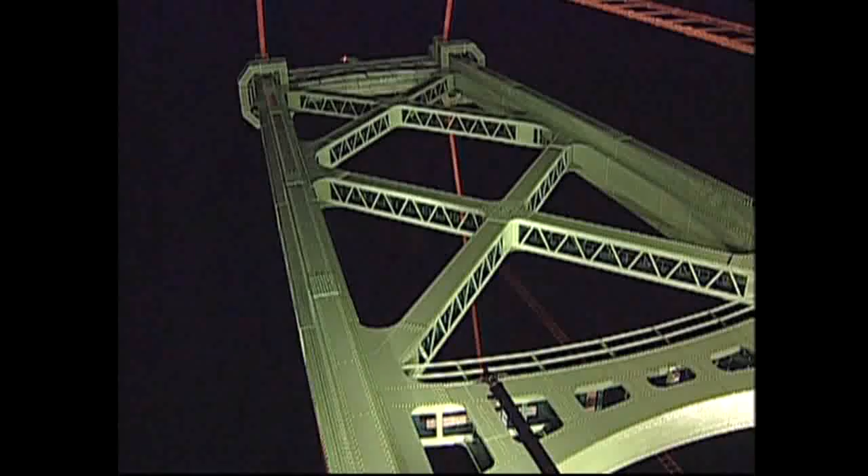The Angus L Macdonald Bridge was not the first bridge across Halifax Harbour. Canadian National Railway built a bridge in 1884. It was a steel swinging drawbridge that was 40 feet wide and a quarter of a mile long. On September 7, 1891, a severe storm blew it down.

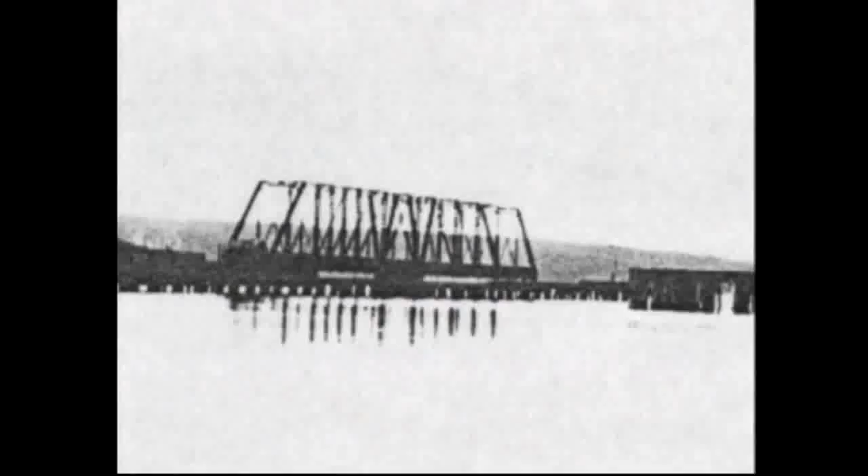The second bridge was built in 1892. It lasted hardly a year. There was no storm this time, no roaring wind. The bridge simply collapsed on a calm July night. The builders had tried to drive bridge pilings into solid bedrock.

It was not until after World War II that plans were laid for building a third harbour bridge. Angus L Macdonald was the man who recognized the need for it. Post-war Halifax was growing, and harbour ferries could not handle the increase in traffic.

Returning veterans from the war wanted the good life that they had dreamed about when they were slogging through mud in Europe or sailing the raging North Atlantic in supply convoys. They wanted a good job, a home of their own, and an automobile.

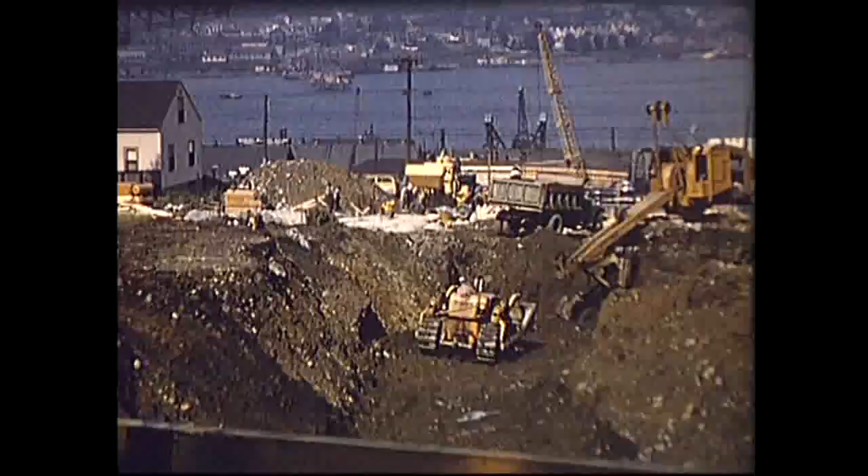For the generation still shaken by the Great Depression and the Second World War, the Angus L Macdonald Bridge was to become a symbol of hope, a sign in the sky that they could span the tragedy and destruction of the past 2 decades and build a secure and prosperous future. But building the bridge would not be easy. And before it was finished, the Angus L Macdonald Bridge would cost 6 men their lives.

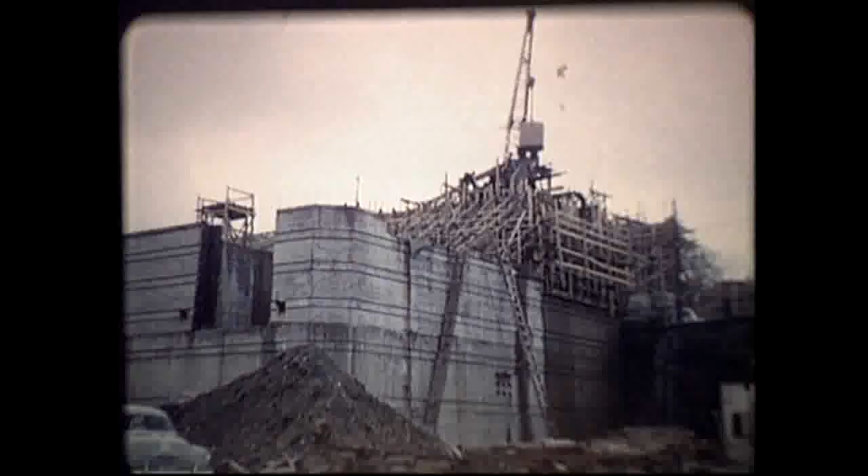The foundation was first. 2 massive concrete blocks, each weighing 20,000 tons, anchored the bridge on both sides. And in the case of a suspension bridge, the massive anchorages for the cables are sort of like icebergs. You don't see half of the mass of the anchorage when you look at them now, because half of it at least is underground. So they are very massive indeed to resist a very heavy pull.

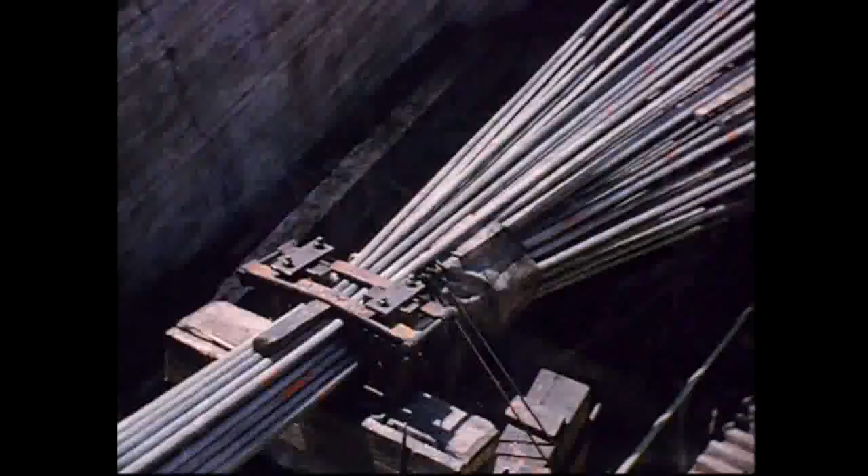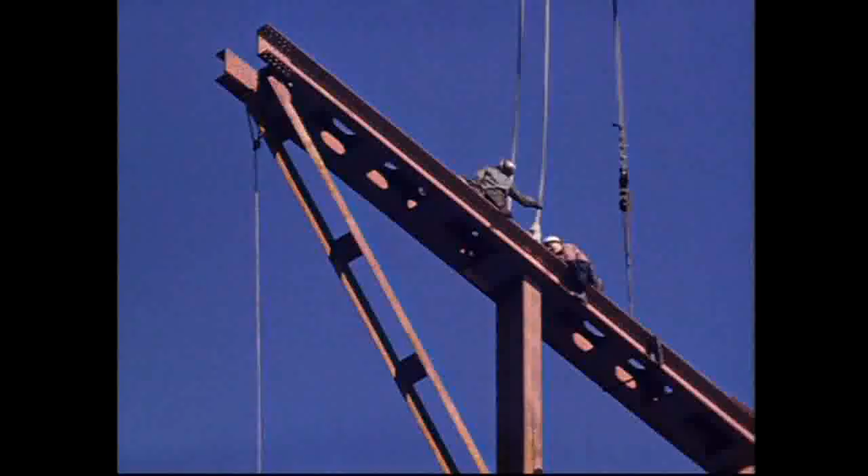People stood in awe to watch steel beams flung out over the water and then set in place and riveted. One span after the next extended from both sides at once. They were like arms reaching out for a handshake. So the bridge suddenly sprouted in 1954.

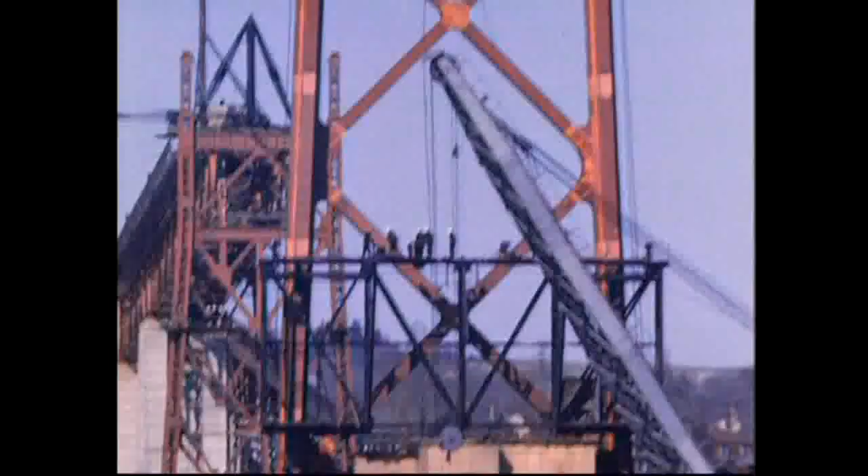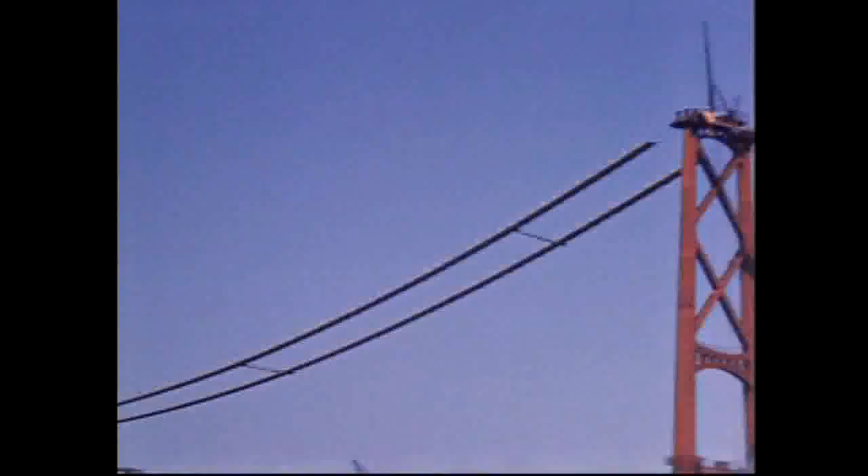By the late summer, we had the towers up and started putting the cables up. And that took about 3 weeks to put the cables in place. And then we started putting up the trusses, and the bridge took shape in about 6 weeks.

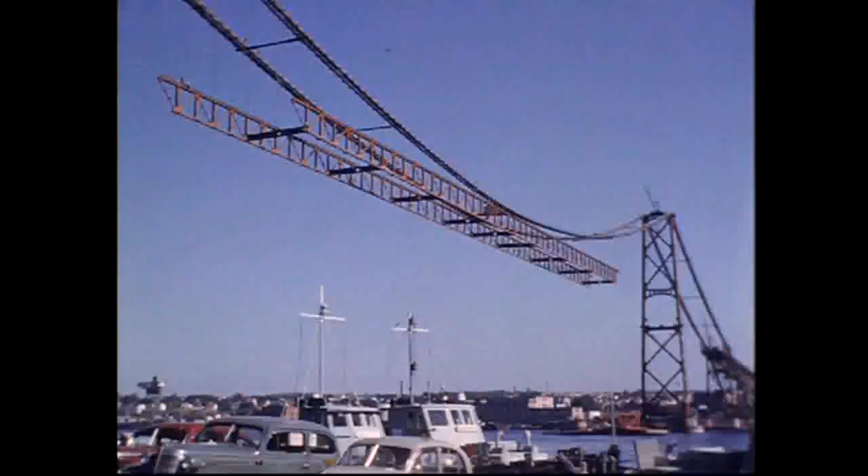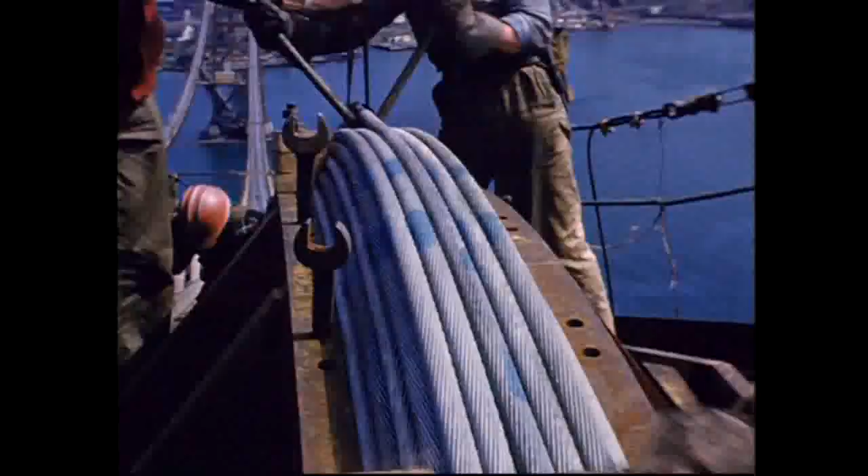Two main towers, each 300 feet tall, were strung with 72 miles of steel strands squeezed into these steel cables. Each cable contained 61 strands. The towers and piers carry the dead load of 75,000 tons of concrete and 8,200 tons of steel.

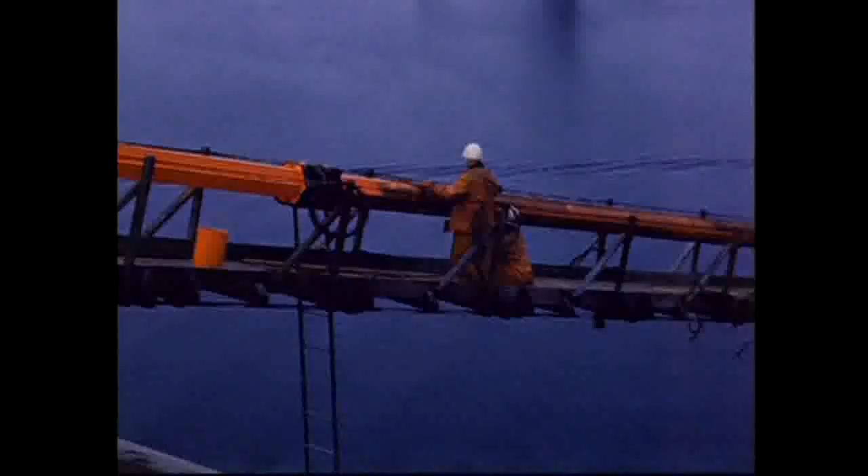Yet for all that weight, the Macdonald Bridge seems suspended in the wind as it stretches nearly a mile from shore to shore. Hugh Prattley was on site the whole time of its building. He was even up here with the ironworkers. For him, this was the top of the world.

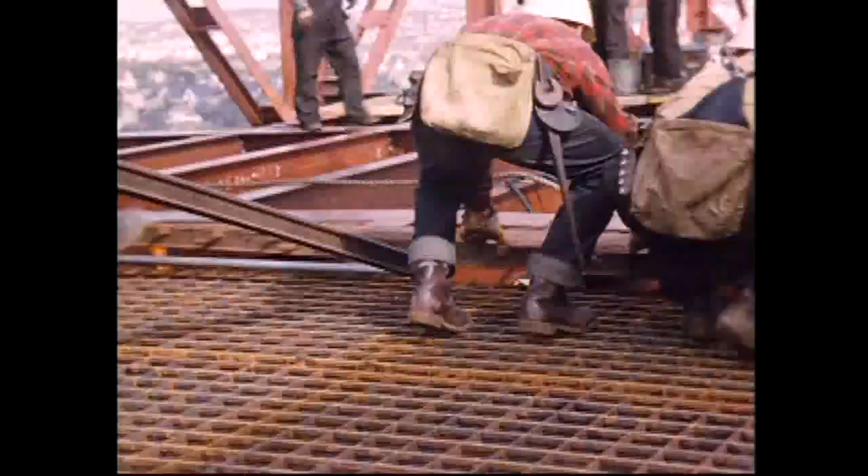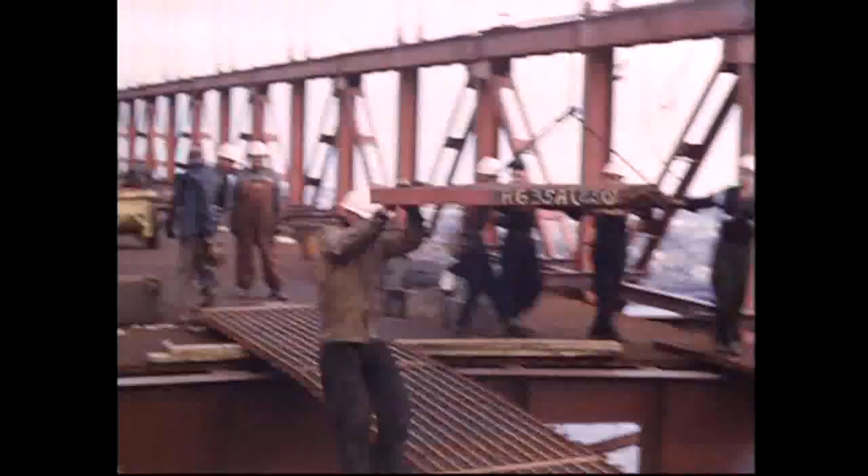From ground level, it looked as though these men were riding girders and trusses across the sky. They were iron men who pulled muscle from bone with the climbing and scaling to the tops of these towers. They were tough, and they were fearless. On July 3rd, 1954, a random wind caught one of them and threw him to his death 200 feet below. His name was Jean-Marie Boulanger.

But I actually witnessed one man hanging on for dear life because the catwalk was twisting badly, and eventually it threw him off. He couldn't hold on, and I saw him fall right into the harbor. It was a terrible experience for me to witness that. Of course, he was killed instantly, unfortunately, but it was best for him that it was instantaneous, I guess. By the time the steel grid deck was set in place, 5 more men would lose their lives in building this bridge.

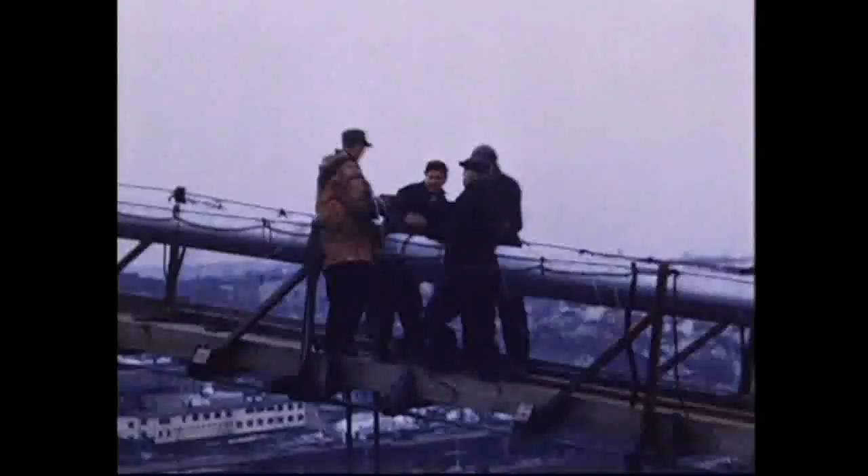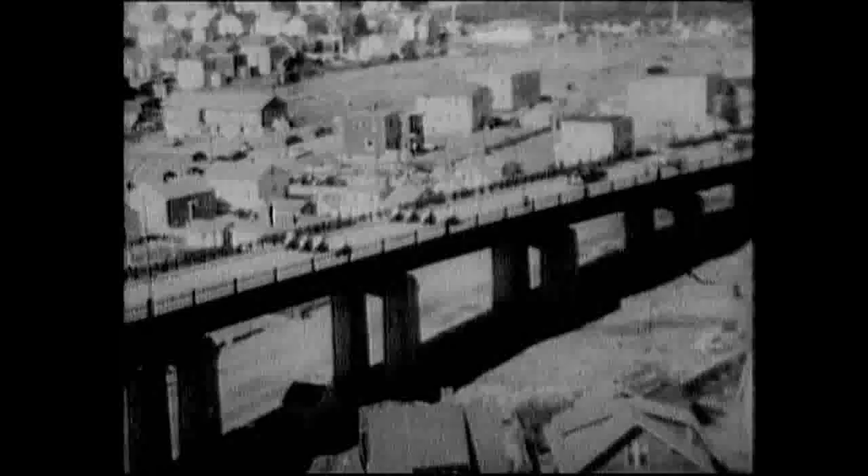On April 2nd, 1955, the Angus L Macdonald Bridge was officially opened. Almost at once, the Macdonald Bridge proved its financial worth. The estimate was we would get up to 1 million vehicles per annum by about the 3rd or 4th year. In fact, we had 2.5 million the first year. Over the next 40 years, the bridge became an old friend to both Halifax and Dartmouth. Often, it was the focal point for civic celebrations.

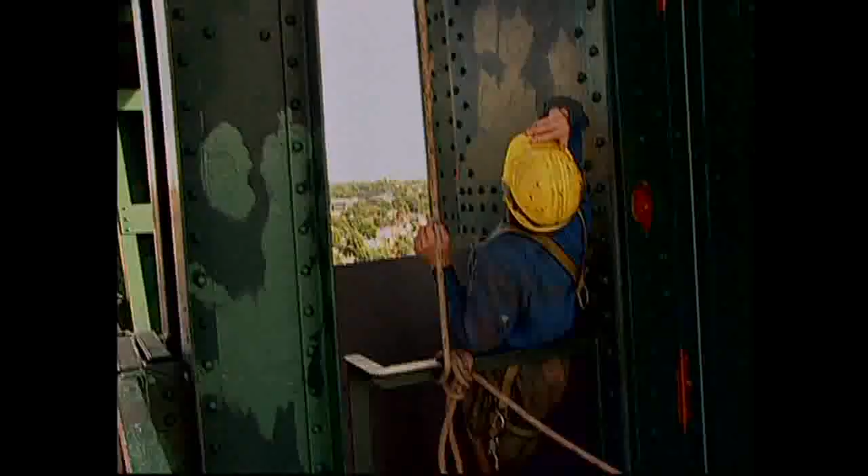Each day for 40 years, thousands and thousands of cars beat the pavement down to the steel decking. Time and the weather have worn the shine off the old bridge. During an annual inspection, the engineering firm O'Halloran Campbell determined that rust and corrosion have made the bridge a little frail and much in need of rejuvenation. The approach decks needed replacement.

So I began to think, well, if we're going to mess up the traffic, so to speak, by tearing up the approach decks and taking a year and a half or whatever length of time to complete the replacement of the approach decks, maybe we should do the 3rd lane because it had been talked about for years. The engineers determined there would be cost savings and time savings in expanding deck replacement into a 3rd lane project, which included the addition of a bikeway and a sidewalk. The engineering began in January 1996. And it'll actually be pre-surfaced.

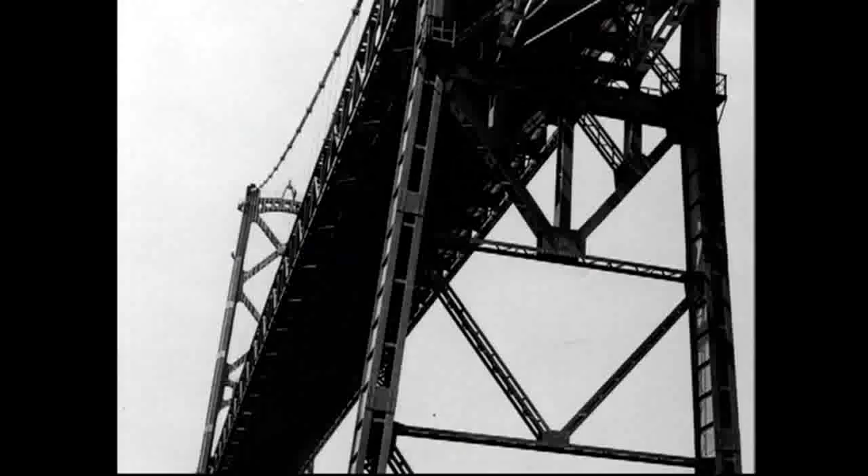There certainly were challenges on the 3rd lane project. One of the big challenges was how do we accommodate 3 lanes of traffic on the bridge from the old 2. That involves changes in loading. Load on a bridge is calculated as dead load and live load. Dead load is the load of the bridge itself, the concrete and steel. Live load is the traffic crossing the bridge. Together, they make up the total load the bridge was designed to carry.

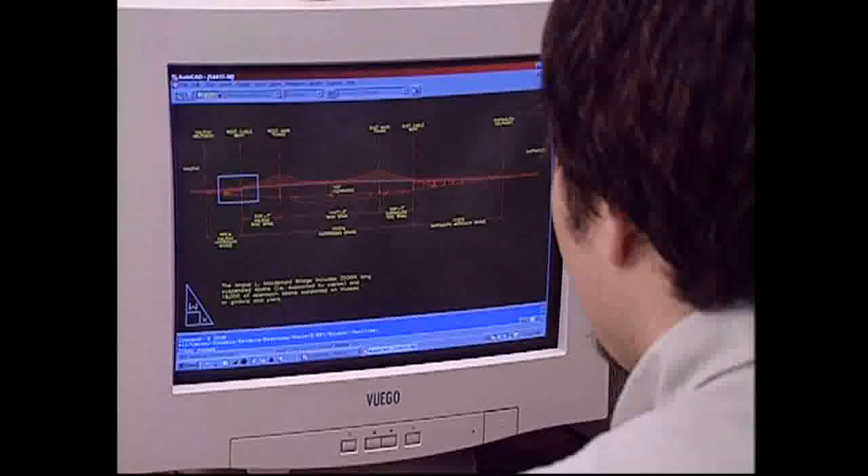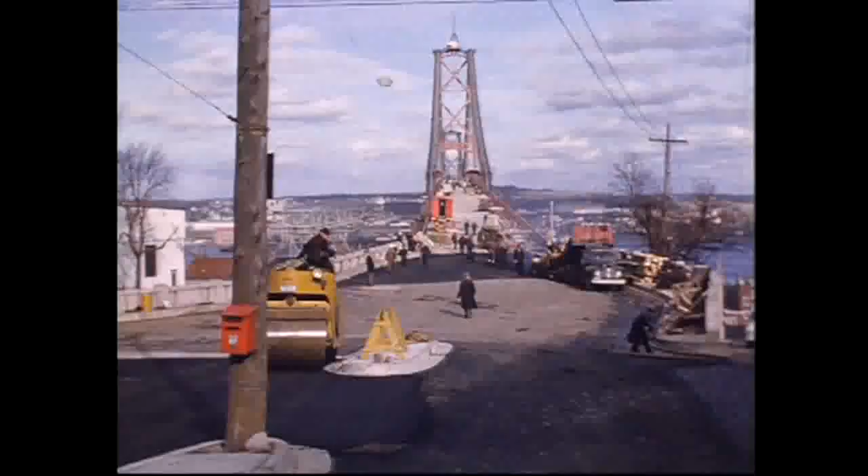O'Halloran Campbell had developed and engineered the method for adding an extra lane of traffic, as well as adding a bikeway and sidewalk without increasing the total load on the bridge. It sounds almost impossible. Now, in the case of this project, we had 3 advantages playing in our favor. The first was that when the bridge was designed in the early 1950s, it was designed for the normal mix of truck traffic. More recently, the approach roads, both on the Halifax side and the Dartmouth side to the Macdonald Bridge, were no longer designated truck routes, so the bridge was not used for normal large trucks. No trucks means that the bridge carries a lot less live load than it was designed to carry.

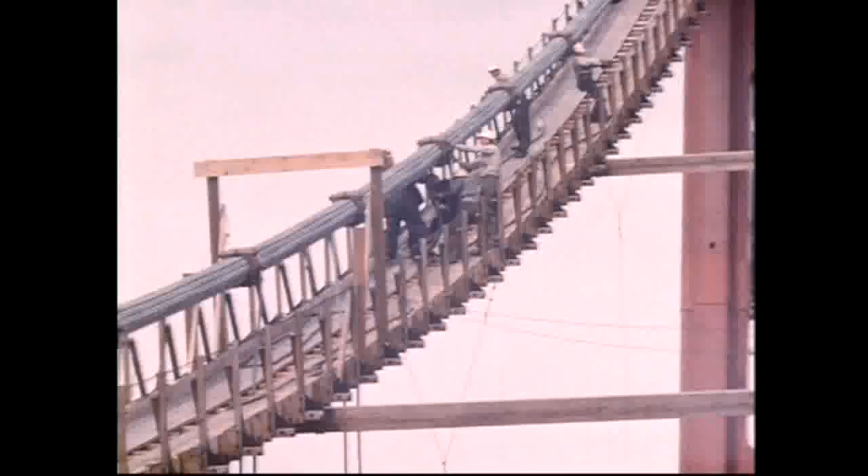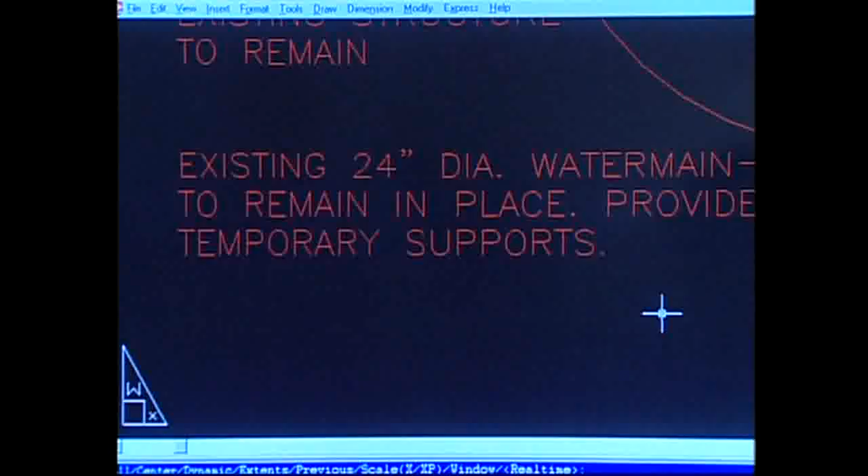The second item in our favor was that whereas the Macdonald Bridge was designed to take a 30-inch diameter water main, when the water main was installed, which was in 1971, it was installed as a 24-inch water main, so it meant that the load from the water main was less than it had been designed to be. In very simple terms, the engineers traded the calculated weight of truck traffic on the bridge and water through the water main for the extra weight of the third lane, as well as the bikeway and sidewalk.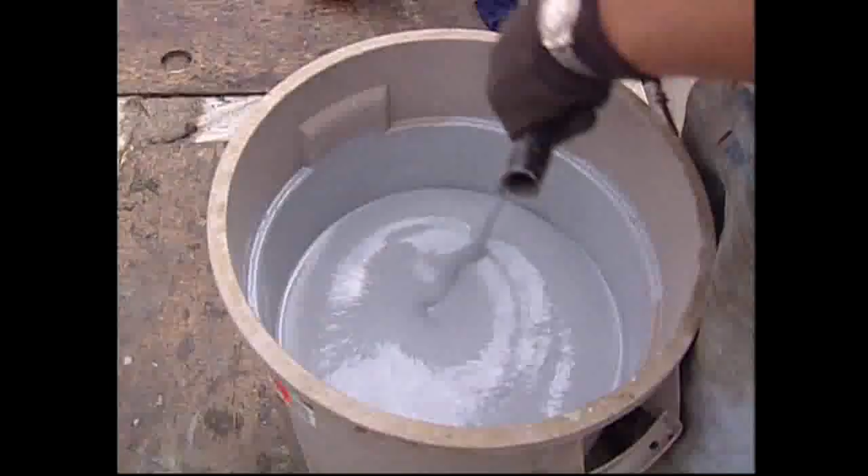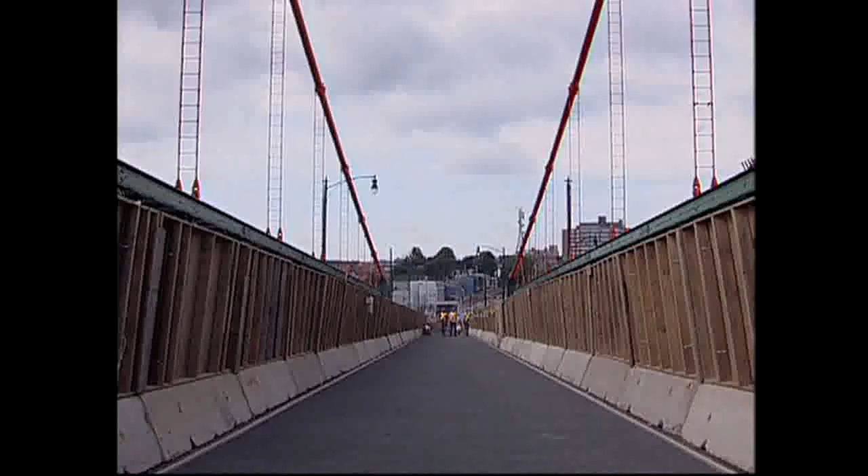A third advantage playing into the project's favor was the engineers' decision to use a lightweight epoxy wearing surface instead of the 1-inch heavier asphalt. Had we not been able to use those lightweight wearing surfaces, and for instance, had we had to accommodate truck traffic, then we would not have been able to move forward with the third lane project.

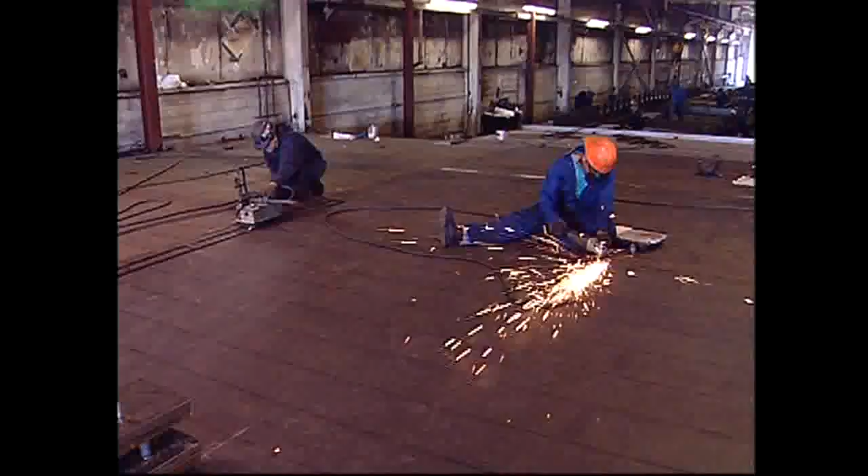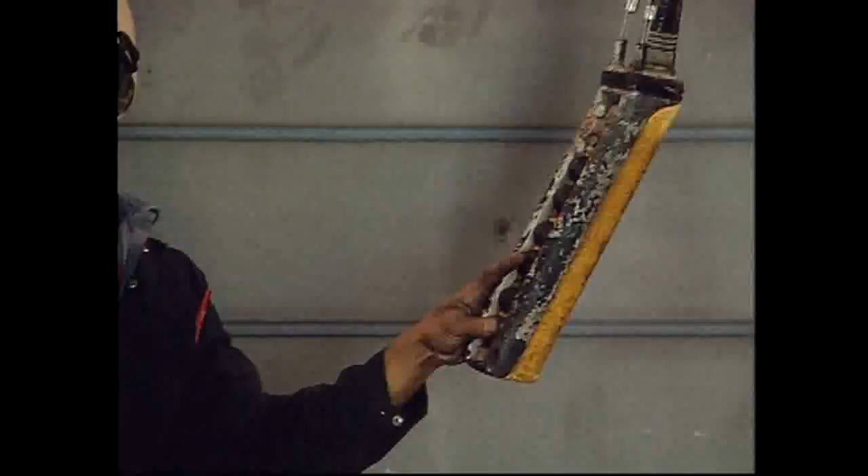Diaphragm plate here. Another factor was the use of a lightweight construction material called an orthotropic steel plate. Steel plate deck and the supporting structure. In simple terms, it's a near horizontal steel plate, which is about ½ an inch thick, and it has stiffening ribs running underneath it in the direction longitudinal to the bridge, that is, with the direction of traffic.

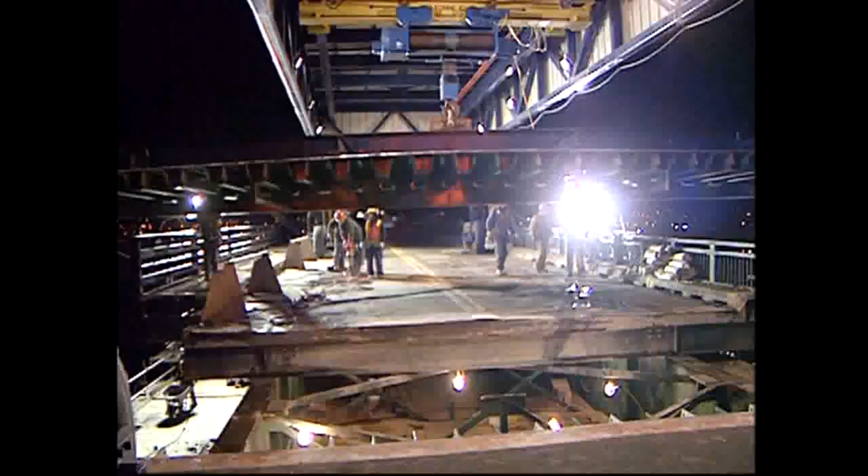The orthotropic steel plate allowed the engineers to design deck replacement one panel at a time. This new lightweight orthotropic steel plate would be used in the roadway area on the approach spans and on the sidewalk and bikeway. The next engineering challenge was this: where to put the third lane of traffic and where to put the bikeway and sidewalk.

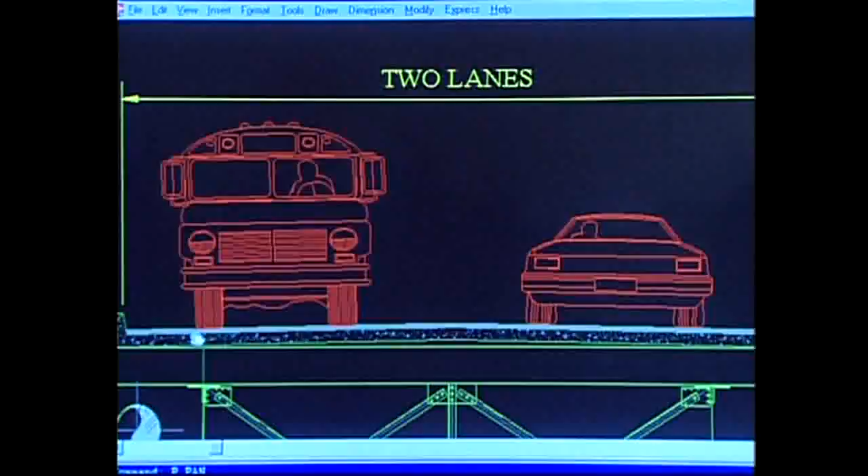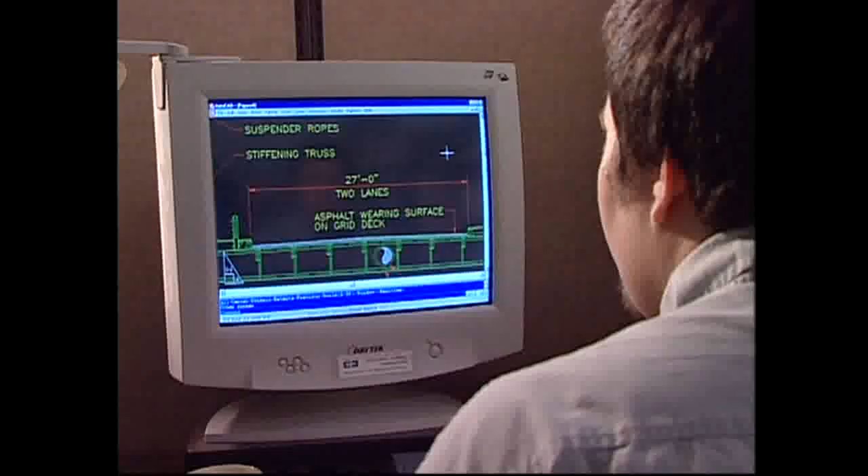On a suspension bridge, the width between the stiffening trusses is fixed. To the average eye, there just isn't enough room to accommodate a third lane. O'Halloran and Campbell, however, did not see it that way. What they saw was the width between the stiffening trusses accommodated 2 lanes of traffic, plus a sidewalk and ductway for utility cables. The sidewalk and ductway each measured about 1.5 meters wide.

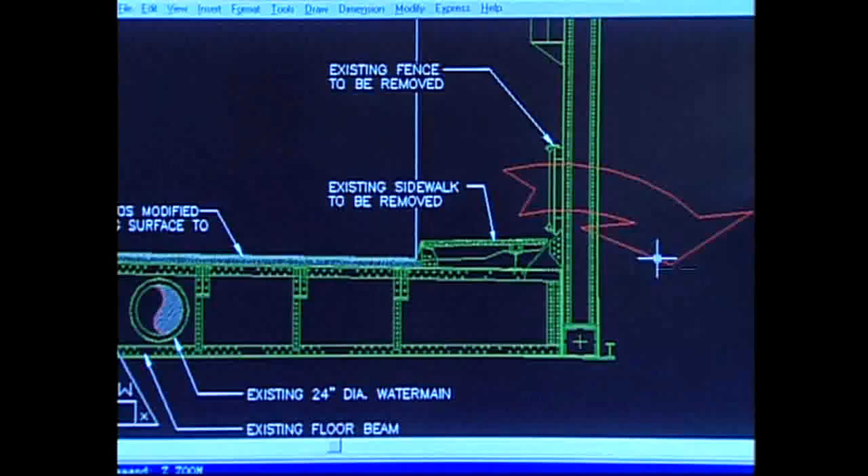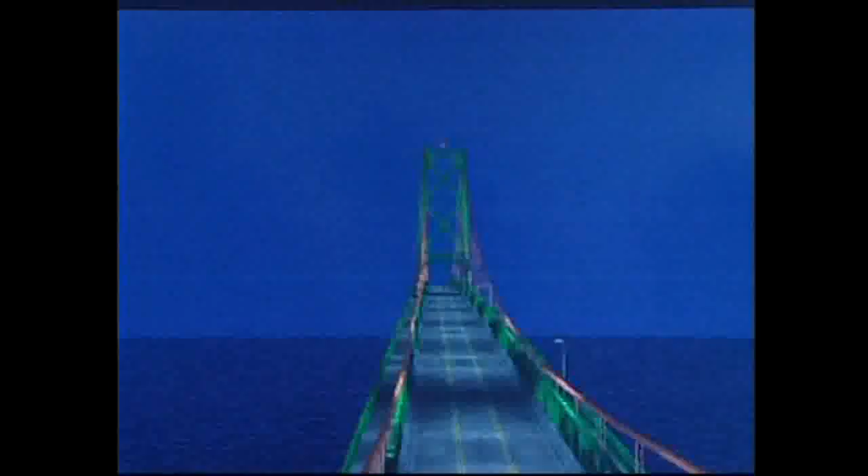We were able to take all of those cables and put them underneath the deck of the bridge in a specially made cableway. By taking the south sidewalk and converting it to a cantilevered structure outside the main truss, and doing an exactly similar thing on the north side with the bikeway, we were able to open up the available width inside the trusses. Cantilevering the bikeway and sidewalk from the bridge structure provided the next big challenge.

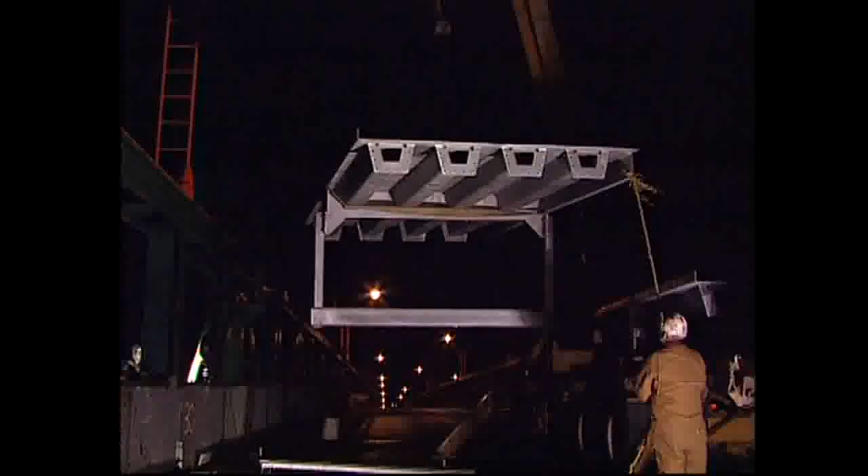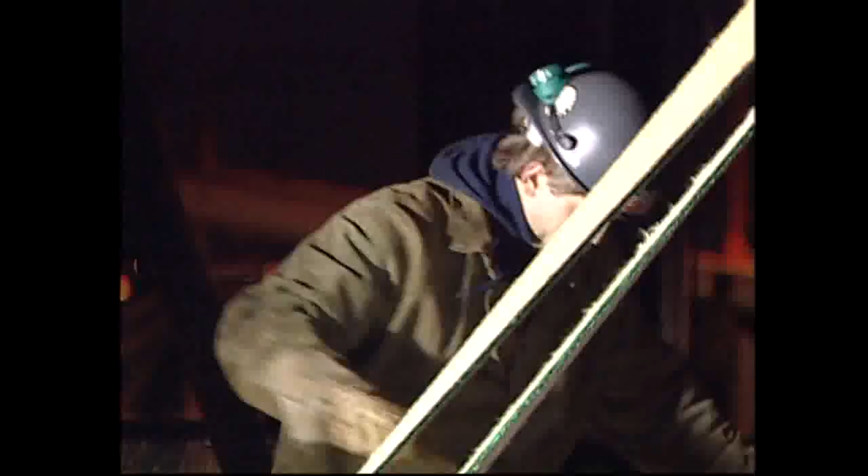It all may look good in a computer graphic, but how well will the bridge and these extensions endure the high winds that blow down Halifax Harbor? The bridge, of course, has been standing there at that time for 40 years and had survived a few hurricanes, and so we knew it was pretty solid, but we didn't know what the sidewalk and the bikeway would do to the wind resistance.

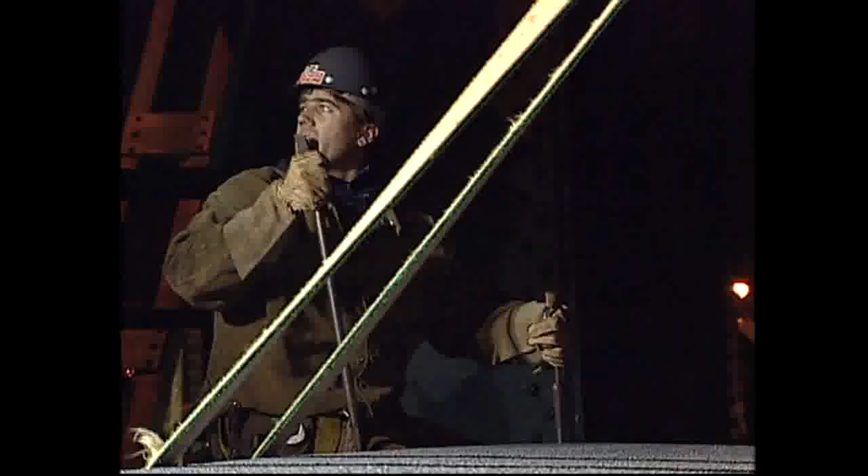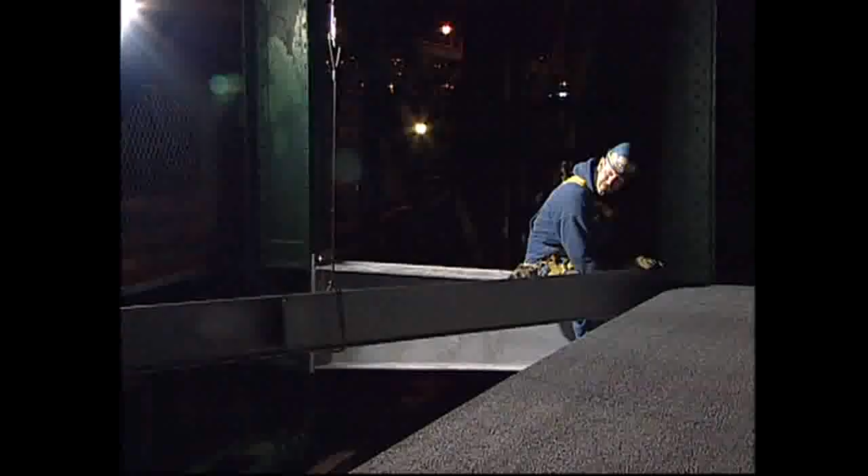Come on down. It was necessary to do aerodynamic modeling, and it was found, interestingly, that the performance of the bridge was better if we had symmetrical cantilevered structures. So that meant the sidewalk and the bikeway could both go ahead as proposed, and they would each balance the other and give better aerodynamics. Turned out to be a safety factor. We had actually improved the safety of the bridge.

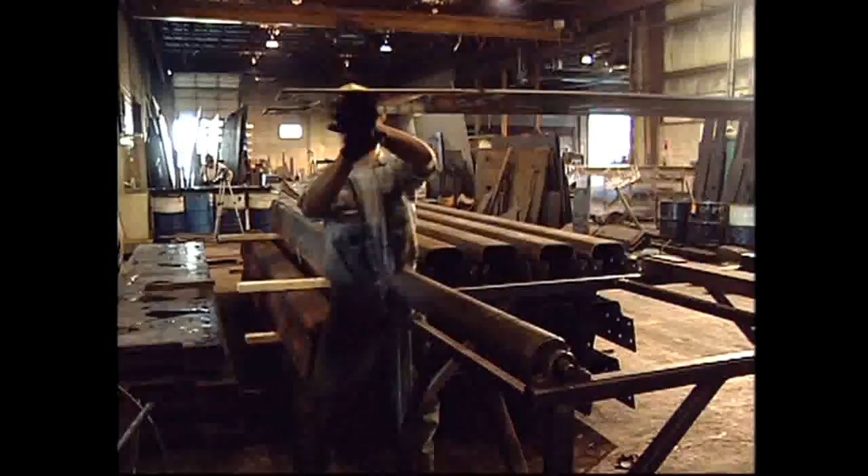The engineers were not the only ones with challenges to overcome. The joint venture of Walter Construction and Cherubini Metalworks had a significant challenge of their own. They had to renovate the old bridge within very strict time constraints. The most difficult was the replacement of the approach span roadway decks. We had to take off the old existing reinforced concrete deck and replace it with a new steel orthotropic deck panel.

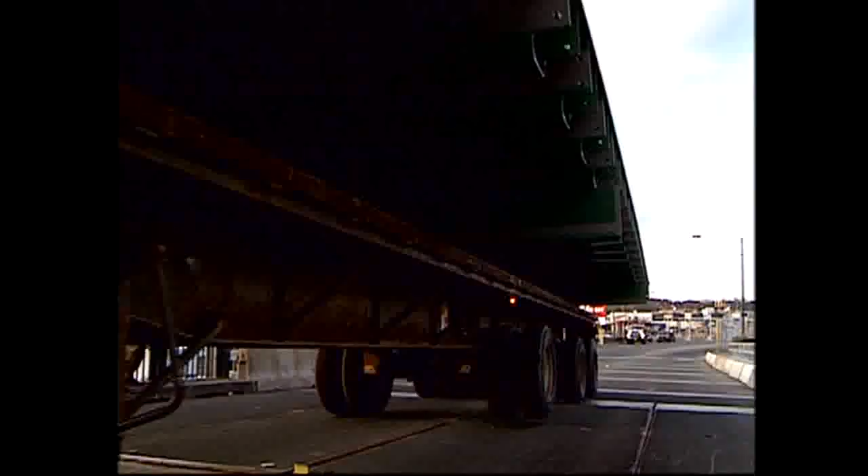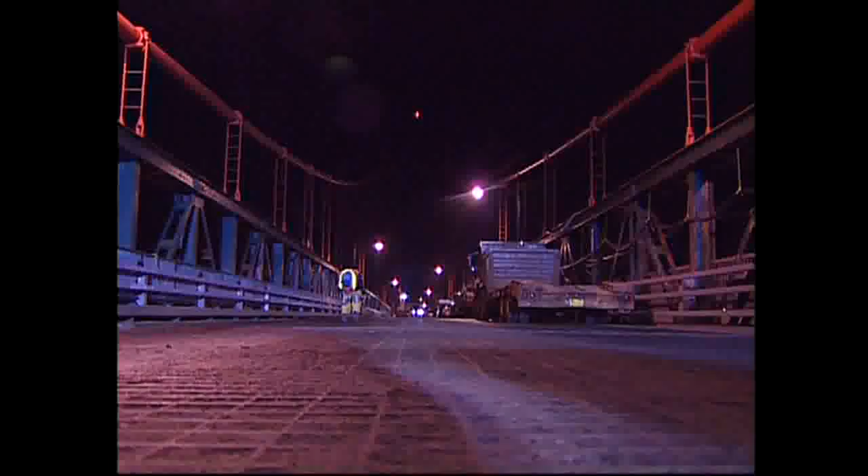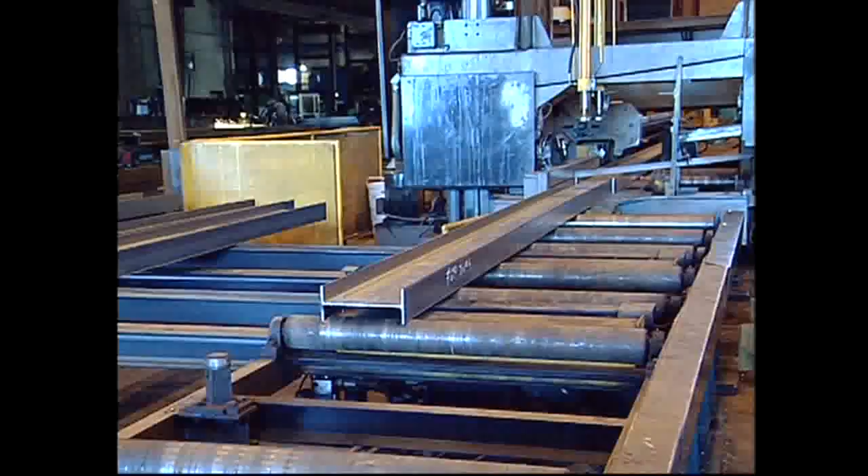Those replacements had to be carried out overnight between 7 p.m. and 5:30 a.m., which was the only time at which we could close the bridge to traffic. Getting those panels fabricated and in place through those time periods was a significant challenge. To meet both the daily and project completion deadlines, Cherubini had to pre-assemble all replacement sections at their Dartmouth location. Cherubini welded 17 steel plates into a single unit that measures 40 by 17 feet.

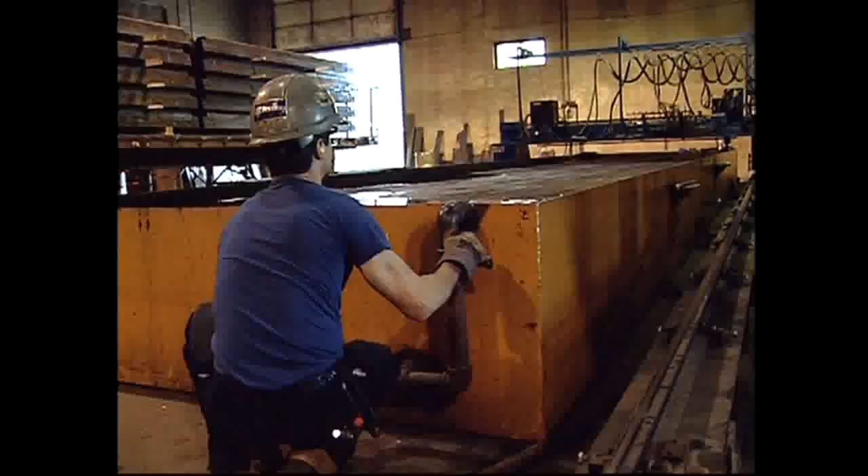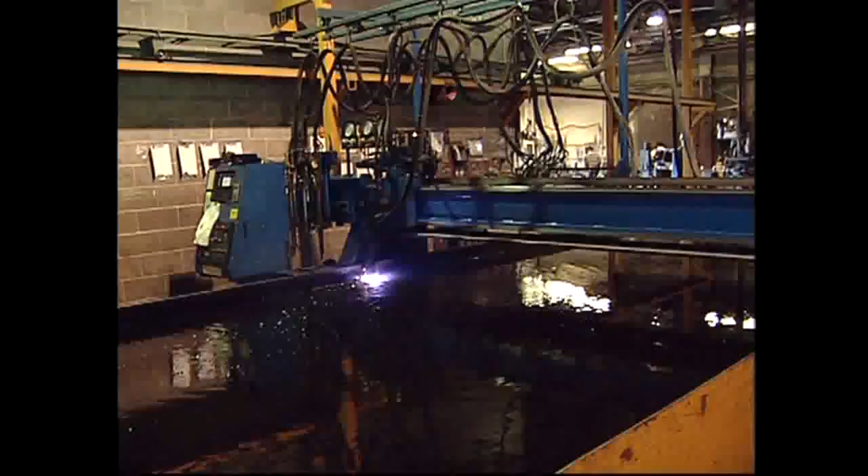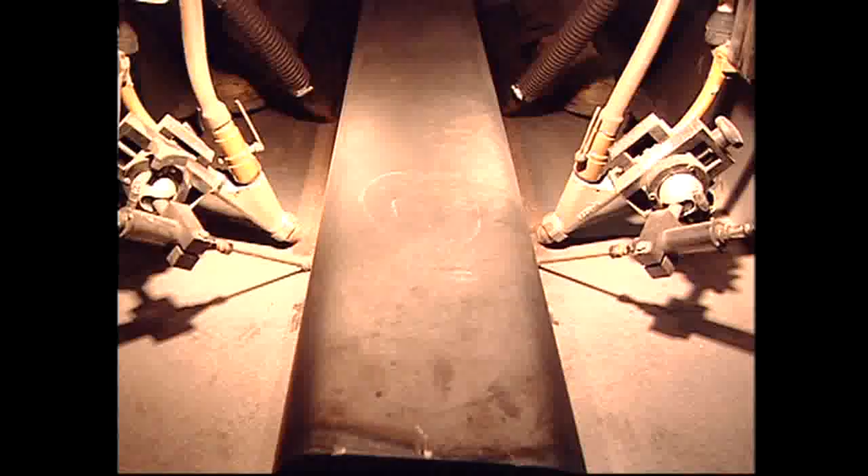The ribs were fabricated, again, from flat steel plates. They were cut out on a plasma machine to cut to the profile of the rib plate. A plasma burning table is like a cookie cutter for steel plate. The steel plate is submerged in a water tank to reduce heat input and thereby reduce distortion in the plate. A bending machine bends the rib profile into the desired shape. Using a traversal welding machine, Cherubini attached the ribs to the deck plate, which is equal in width to 3 lanes of traffic.

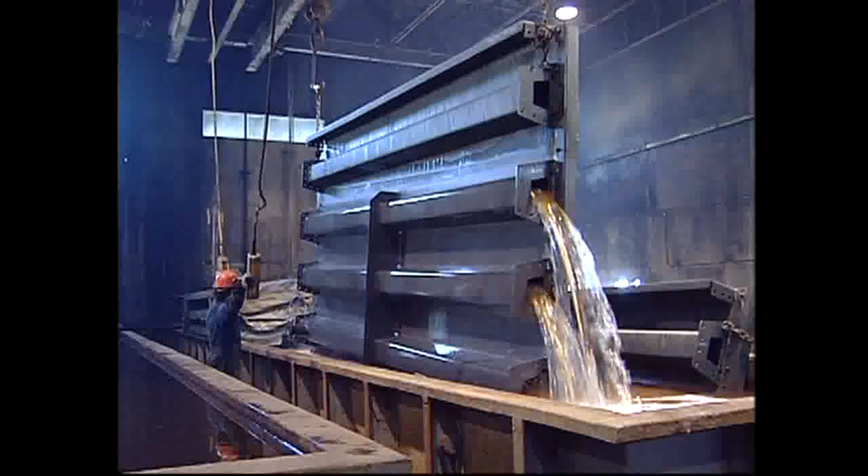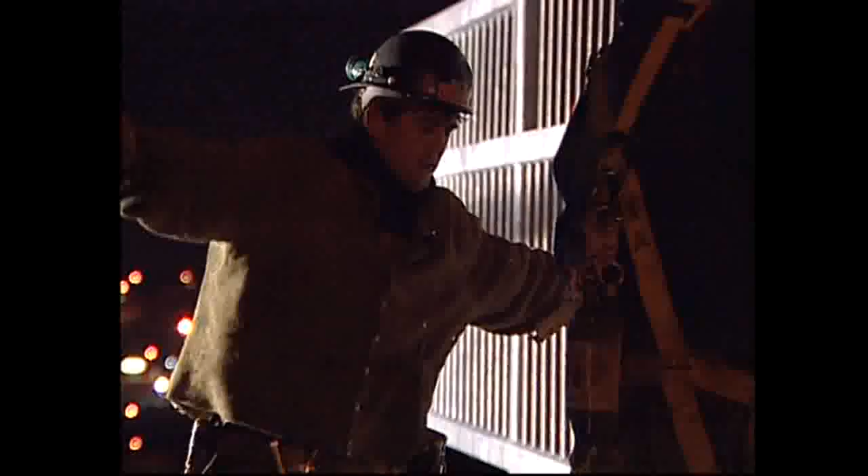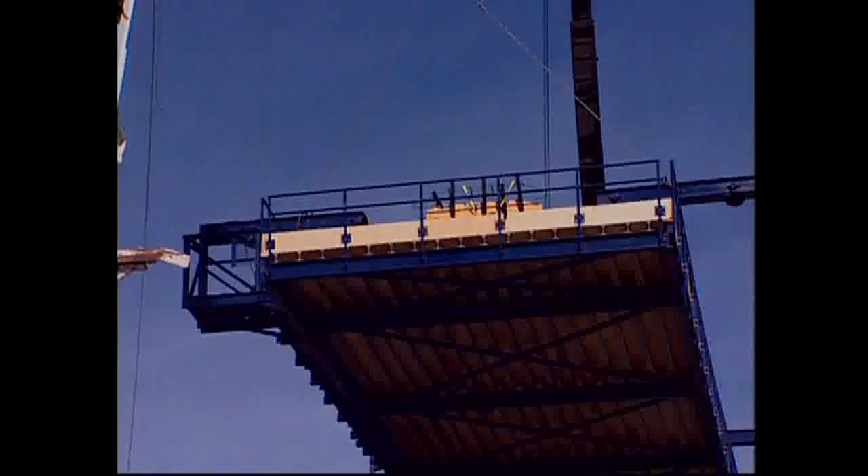The sidewalk and bikeway panels were also fabricated in our Dartmouth plant, and they were trial assembled to each section of the bridge as we progressed through the work. That allowed us several advantages. It mitigated the risks of weather. It also allowed us some schedule advantages because those could be built off in the shop while we were doing other things out on the bridge. Walter Construction also designed special scaffolding to give their workers safe, unrestricted access to the underside of the bridge.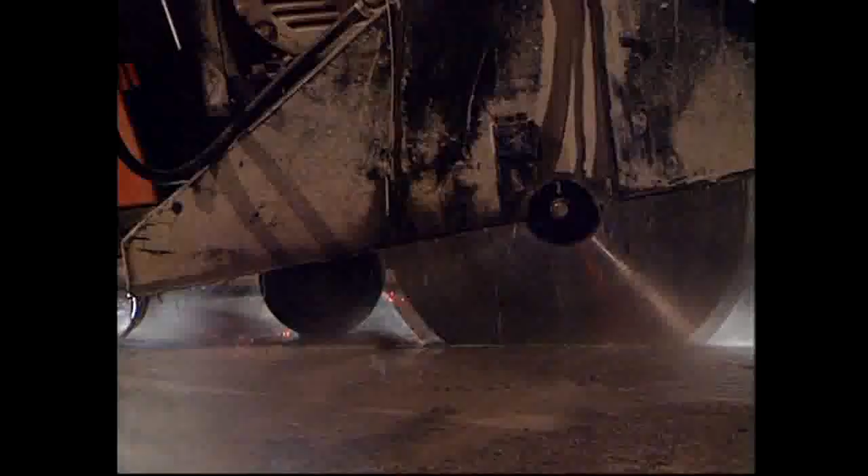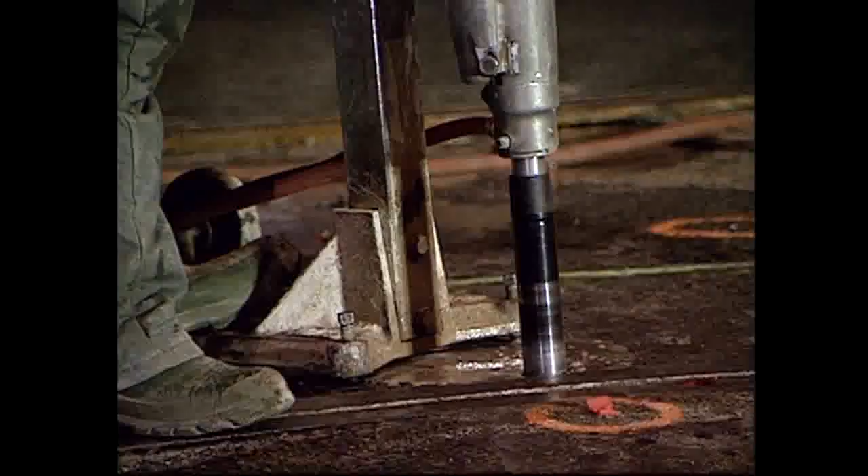The overnight installation of the deck panels required the logistics and clockwork of a military engagement. We developed a schedule for the overnight operations basically on 15-minute intervals. We would go out with big electric saws and core drilling machines, and we would cut the bridge into 2 panels, 10 feet long, the width of the bridge, which was effectively 40 feet. And we would do that the night before they were to be removed. And we would also core drill those panels with holes so that we could put a steel plate over them the next day and bolt them down and hold them in place.

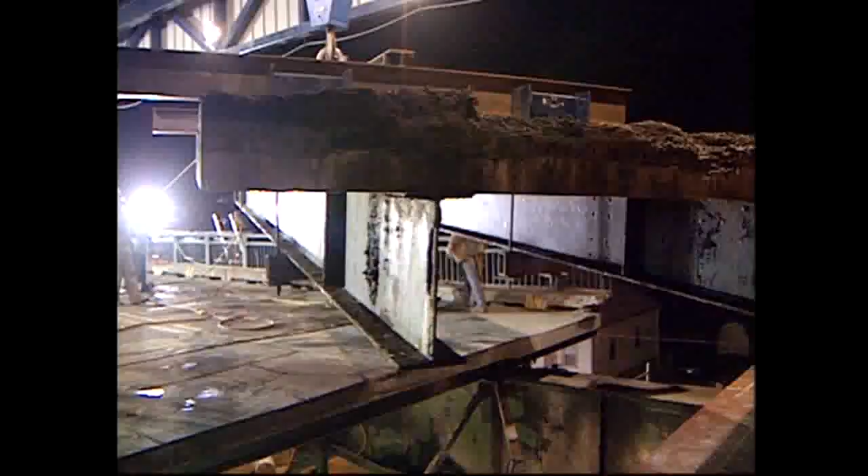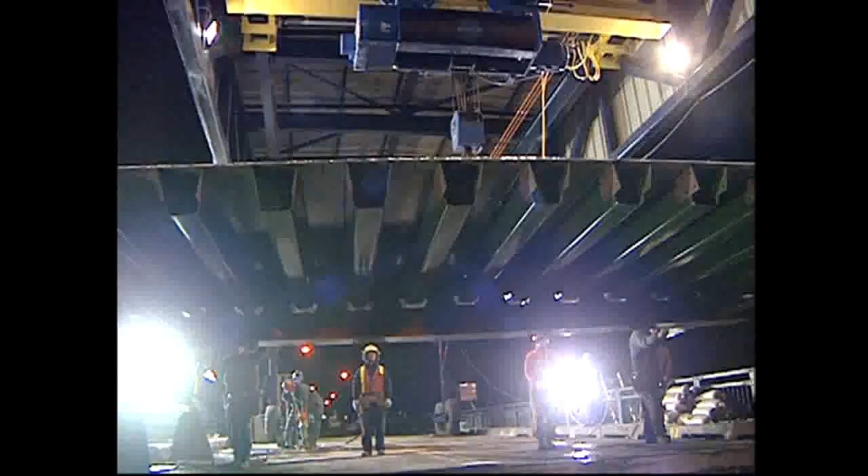Walter Construction also designed a specific type of crane for lifting out the old decking and lowering the new. It's called a straddle carrier. Each night, they rolled the straddle carrier onto the bridge and lifted out the old decking. And we would do that for both panels, and then that would leave us the access to bring in the new orthotropic steel panel and drop it in place. The engineers are on site full-time to make sure each panel fits within acceptable tolerances.

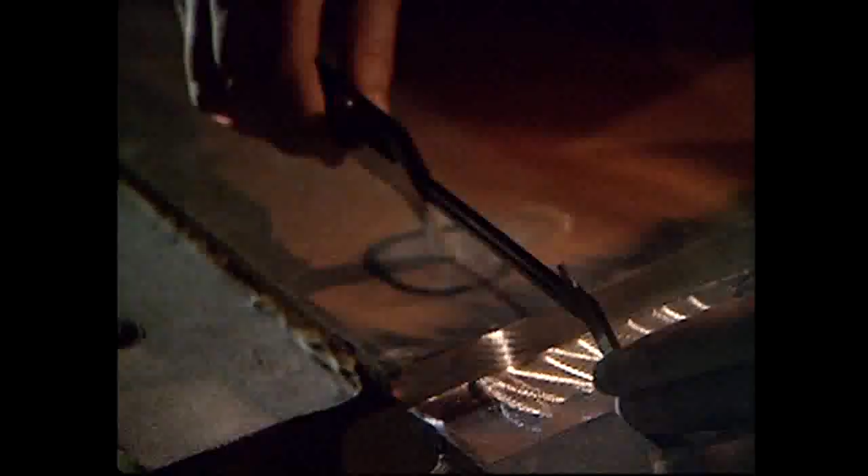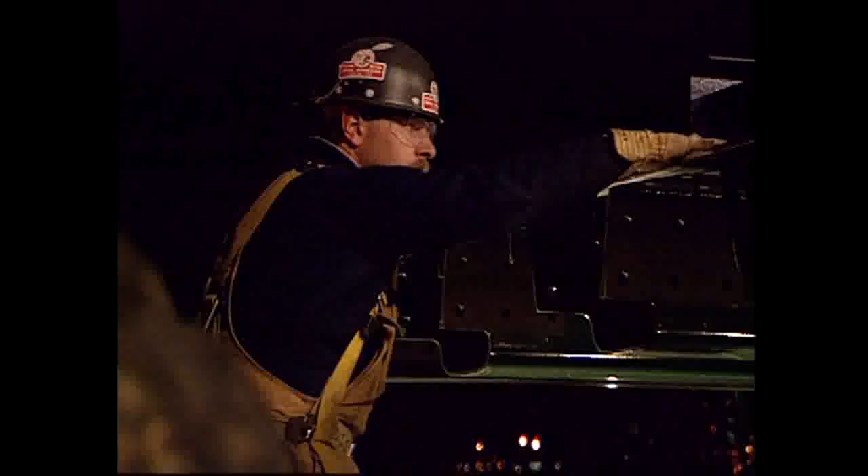Put it on the first one and we'll check it. We had to be within basically 1/8 of an inch in a running dimension at any given time. And there were other considerations as well. We wanted to keep going in a straight line because if you start deviating off our intended line by even 1/4 of an inch, by the time you jump up a number of panels, the bridge would start to run off in the wrong direction, and we didn't want that to happen. To remain on schedule, the joint venture had to install 1 deck panel per night.

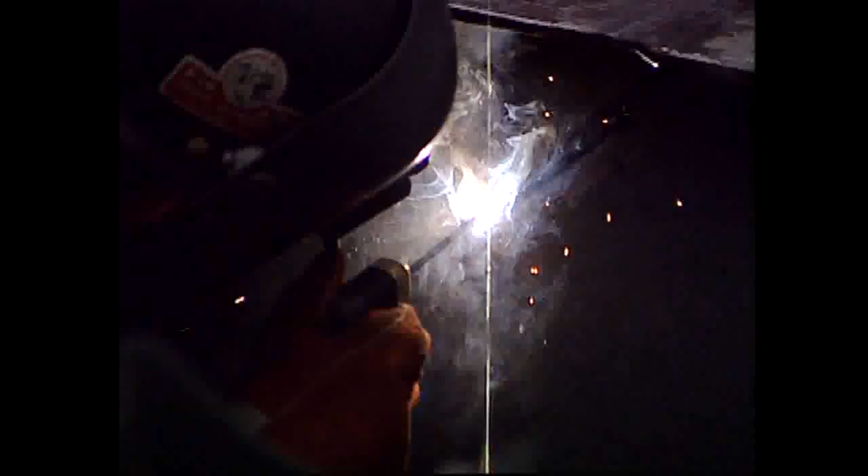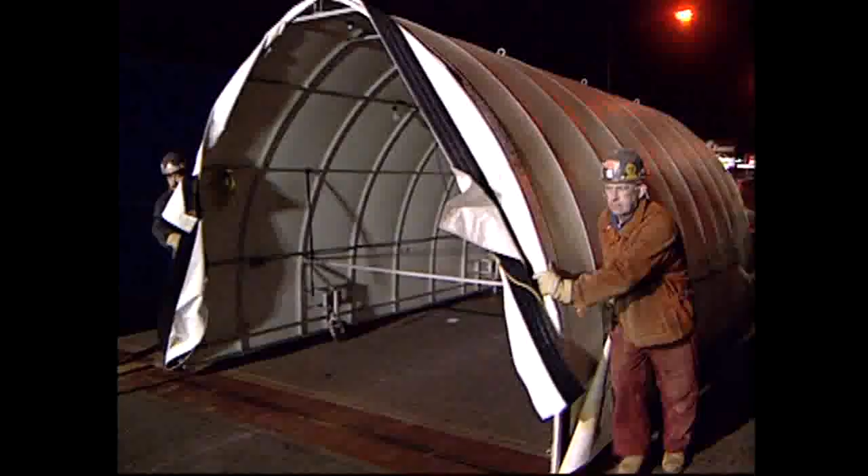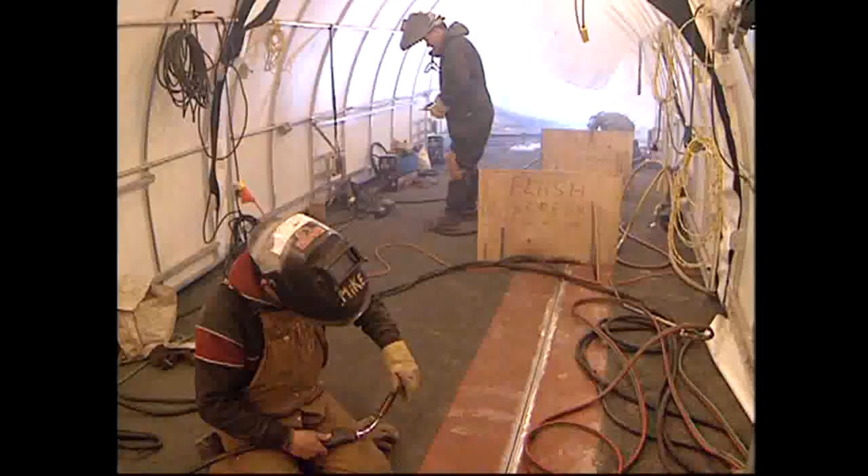Installation of the orthotropic panels required a welding procedure that had to be done under controlled conditions. The Angus L Macdonald Bridge is hardly a controlled environment. If not rain, the high winds would have made it difficult to do the welding. So in order to overcome this, we designed an enclosure, which we referred to as the igloo. It was an aluminum frame covered with plastic, 10 feet by 40 feet long, and we rolled it into place, closed it over the joint, sealed it up, and the tradesmen worked inside that. 4 crews of welders worked simultaneously to get the weld done in time to get the bridge open.

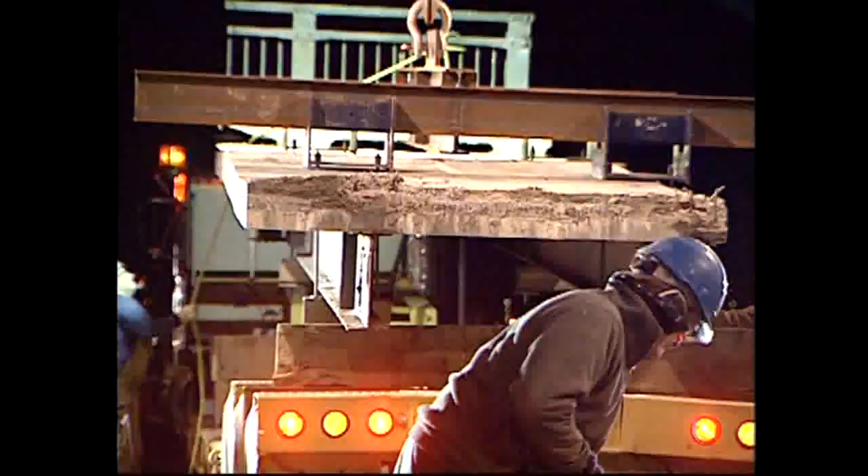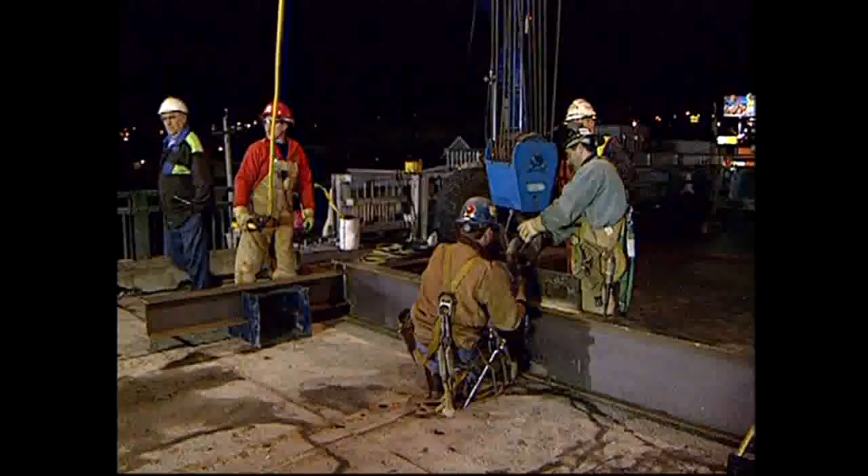Another panel, another night, and another race against the clock to complete the work and have the bridge opened at 5:30 a.m. for rush hour traffic. The installation of 128 orthotropic panels was on schedule. In September 1999, the work was done, 2 months ahead of schedule. In hindsight, it didn't seem all that bad, but at the time it was a very aggressive and very tight schedule. But we pulled it off. The end of the job.

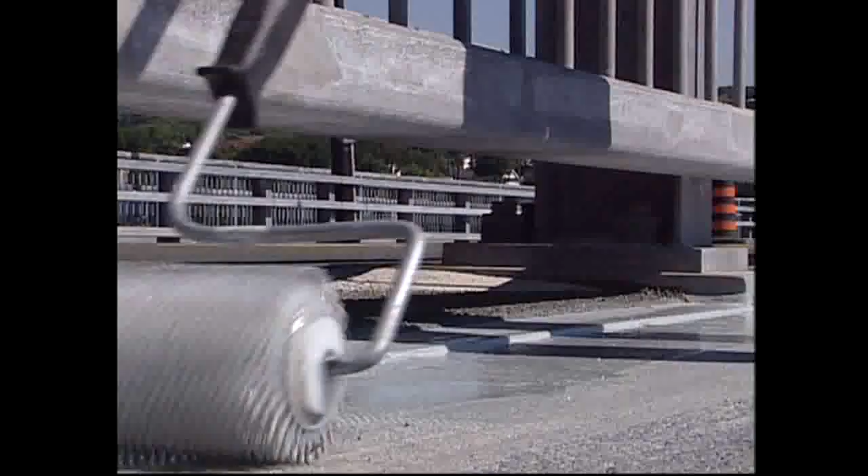Most of the people with Walter Construction are local people, and this is a major project locally. We're very proud of our role. It is a big advantage in terms of an improved link across the harbour. So yes, we're proud of it, and we're very pleased to have been associated throughout the length of the project. We put a deadline of November '99 on them for completion, and they not only met that deadline, they exceeded it. On October 31st, 1999, the new Old Bridge was officially reopened.

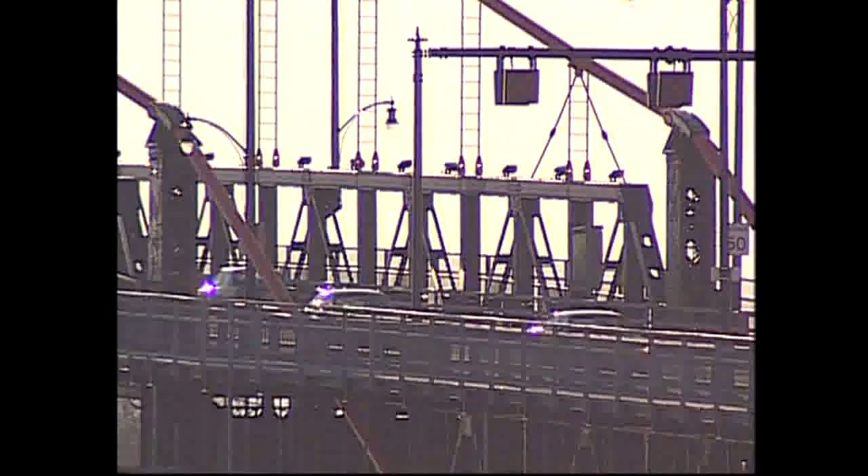In 1955, one generation built this bridge as a promise to the next, that this region of Nova Scotia would prosper and grow. With the addition of the third lane, a similar promise has been made to those generations that will follow. And this partnership of engineers, contractors, steel fabricators, and bridge commissioners has ensured that our new Old Bridge keeps that promise well into this 21st century.